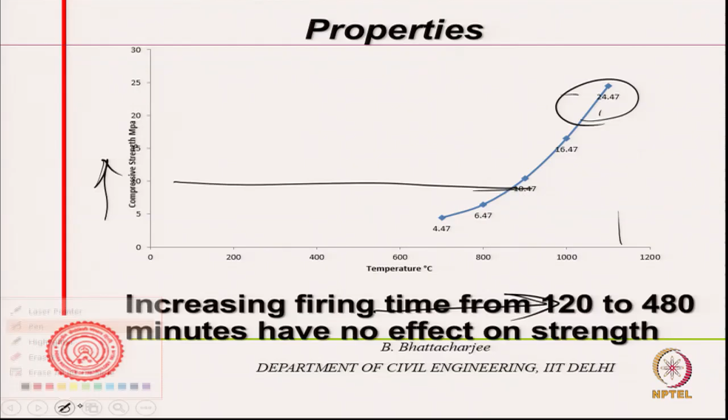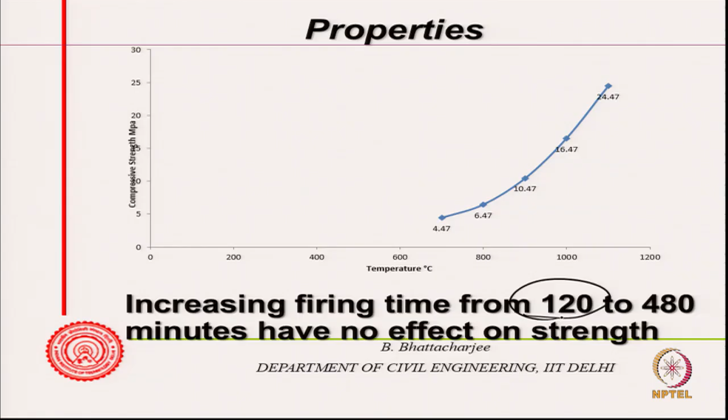Second thing is, increasing firing time of course does not have much of an effect, but at least 2 hours, minimum 2 hours or more, that is the burning time, keeping at the maximum temperature.

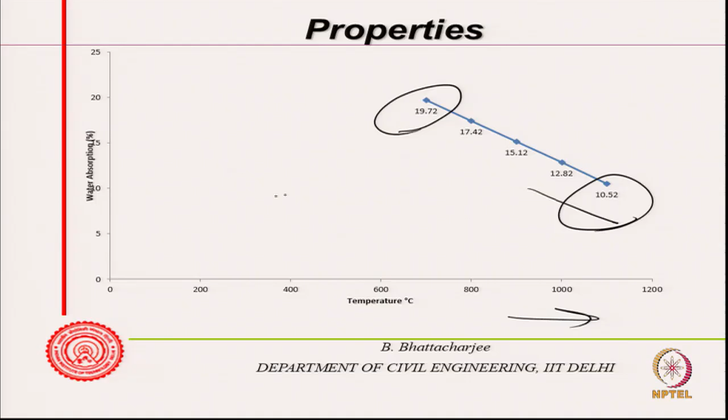Other properties is the water absorption. This is the most important, and this water absorption actually relates to porosity, total porosity. So, as burning temperature increases, water absorption reduces, and you can see the order of this is about 10 to 19%. So, porosity corresponding to this would be even much higher, around 30% or so. So, much higher porosity for these ones.

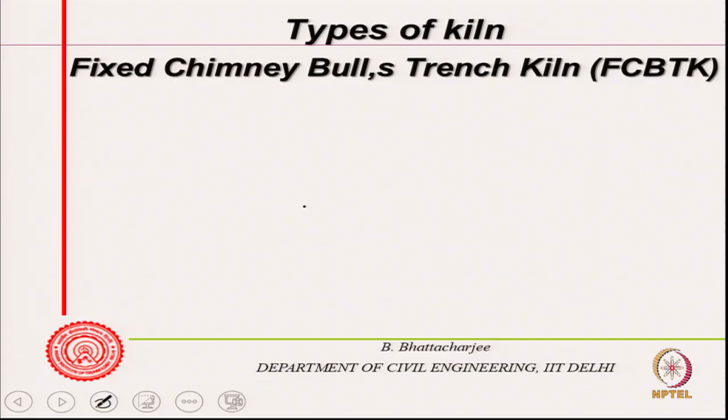Now, where do we produce them? We produce, in the Indian scenario, in the fixed chimney Bull's trench kiln. This is one type of kiln. Here the product is stationary, the fire moves. So, the bricks are arranged in layers, we will see some photographs, and the fire burns and moves from place to place, and then of course, they are taken out.

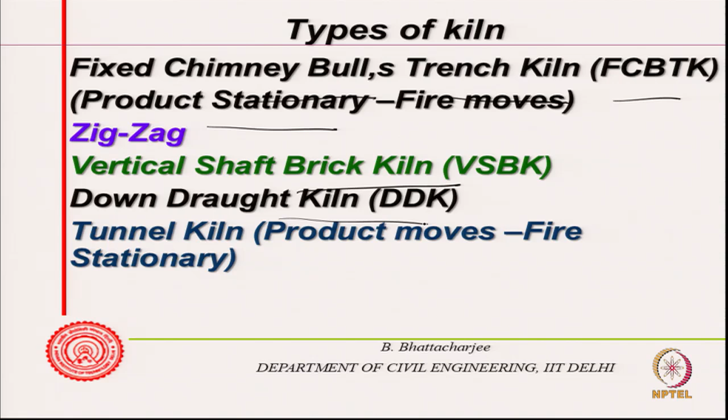So, we have seen before that it is made into plastic state, then molded and dried, and then of course, this will happen. Then there is something called zigzag kiln, which is a variation of this one, but now the fire will move in a zigzag fashion rather than in a straightforward fashion. Then of course, vertical shaft brick kiln, down draught kiln, and tunnel kiln. In tunnel kiln, product moves, fire is stationary.

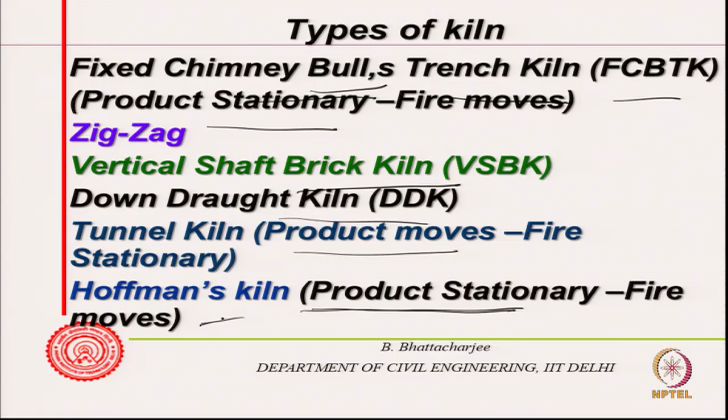So, Hoffman's kiln, product stationary, fire moves. The Bull's trench kiln is named after Mr. Bull, who introduced this in the Indian scenario. So, these are the types of kiln you have. So, we can look into each one of them one by one.

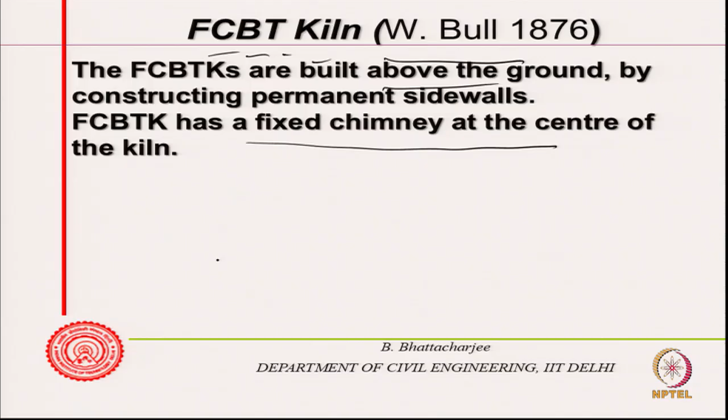So, fixed chimney Bull's trench kiln. This was introduced by W. Bull in 1876. These are built above the ground by constructing permanent side walls and have a fixed chimney at the center of the kiln. Green bricks to be fired are placed in the annular space and covered with a layer of partially fired green bricks as insulation, forming a temporary roof. A layer of ash and brick dust is spread over the top to seal the kiln and to provide thermal insulation.

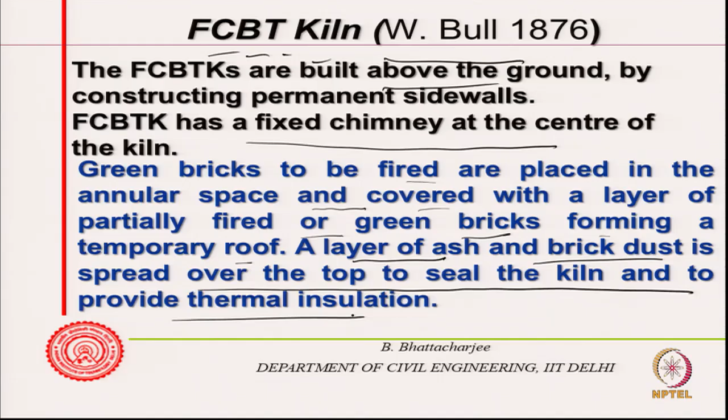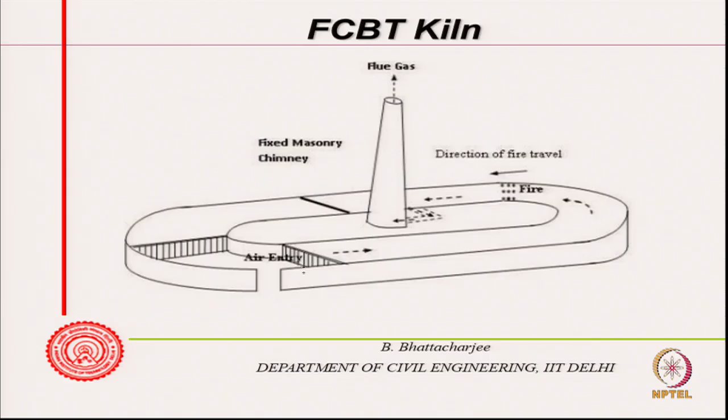So, essentially thermal insulation is provided by the roof, and this is how it looks. The bricks are arranged in this manner. Air will enter from this side, and the fire will move in this direction. The fuel is also in the same arrangement, because you have got layers of bricks and the fuel is also there. So, the fire will move and the smoke will move out through the chimney finally. Once the firing is over and cooled, bricks can be taken away. So, this is the diagram.

So, these are the fired bricks. This is the firing zone, where the firing is still going on, and this is at a higher temperature, and this is the preheating zone. So, first preheating, then these are the green bricks, and there are entry points for the chimney. So, for example, when it was burning here, the smoke would enter like this and reach there. Similarly, when it is burning here, the smoke will enter like this.

So, loading and unloading area is this. So, here green bricks are loaded in this manner, and fired bricks are taken out from this manner, right. So, here you have preheating zone, firing zone, smoking zone, and there is a cooling zone here. So, once cooled, this can be taken out, and loading and firing area.

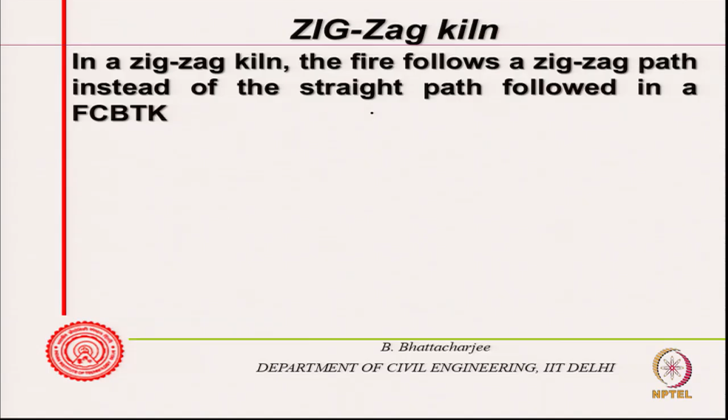There are some open gates through which you can go. So, they are arranged, and the fuel is also there together. So, as you burn, they heat up, and that is how it goes, right. So, this is that fixed chimney Bull's trench kiln that was introduced in 1876, and possibly in many places it is still used. An improvement over this is fire flows in a zigzag path instead of the straight path that is followed here. So, if you see in this one, fire was moving in a straight path.

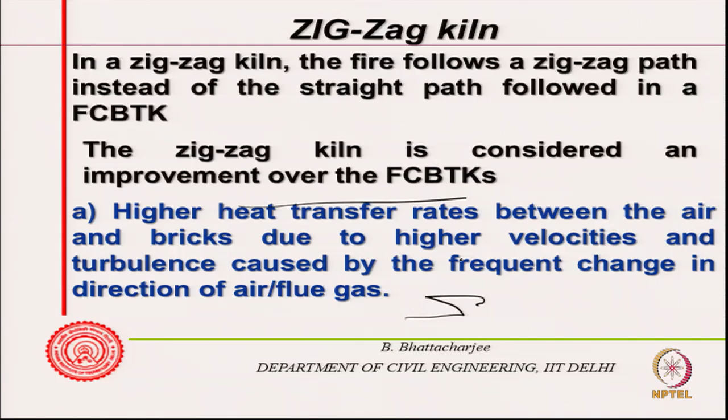The zigzag kiln is considered an improvement over this FCBTK, with higher heat transfer rates between the air and the bricks due to higher velocities and turbulence caused by the zigzag path, frequent change in direction. So, if you change direction, obviously turbulence will be created, and the local velocities could be higher, and that's what gives efficient burning. So, this gives us improved combustion due to better mixing of the air and fuel in the combustion zone, and longer time available for volatiles in the combustion zone, right.

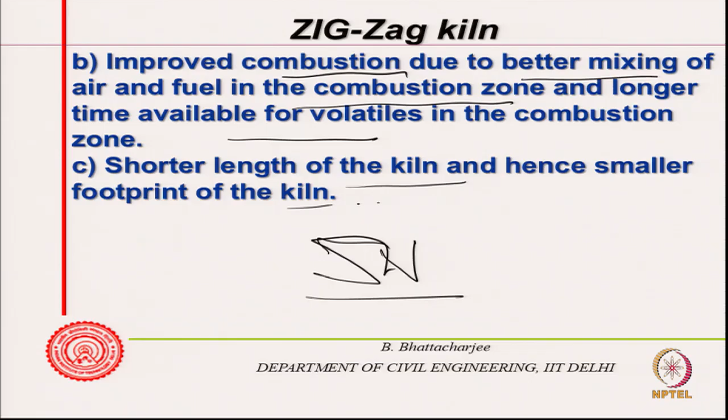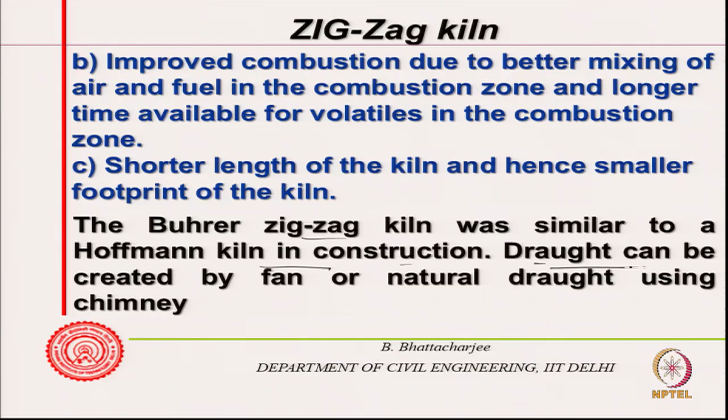Shorter length of the kiln and hence smaller footprint, because now it is zigzag. So, you can cover the same length in a lesser area. So, that's the idea. It is an improvement over the previous one. The Buhrer zigzag kiln was similar to Hoffmann's kiln in construction. Draught can be created by fan or natural draught using chimney. So, basically chimney also creates natural draught. Hot gases will tend to go, cool gases will come in.

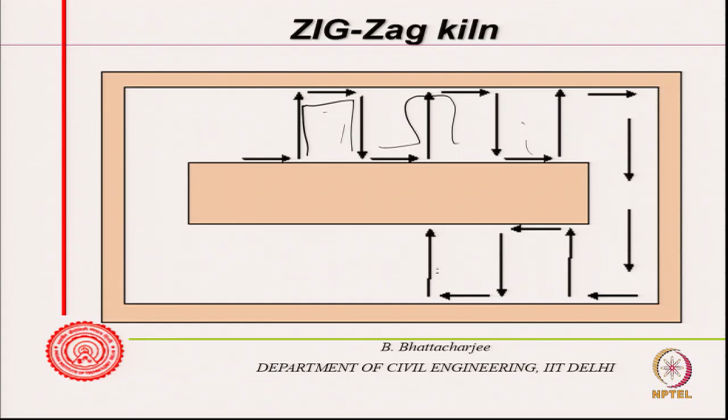In this one, this is how the fire would move, right. So, the path would be something like this. So, bricks would be laid in this manner, so that in the space here it will move in this manner. So, this is how the hot air or the fire moves along in this manner, right. So, this is an improvement over the previous one.

Then there is something called vertical shaft kiln. It has got a vertical shaft of rectangular or square cross section. The shaft is located inside a rectangular brick structure, right. So, the brick structure itself and the shaft is there. The gap between the shaft and the outer kiln wall is filled with insulating material, clay, fly ash or rice husk ash or similar sort of thing.

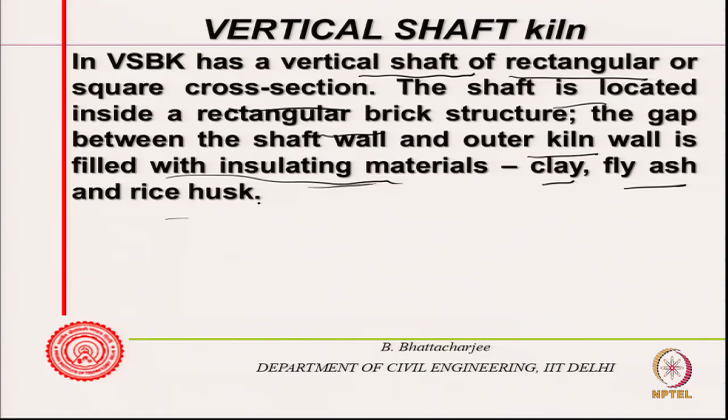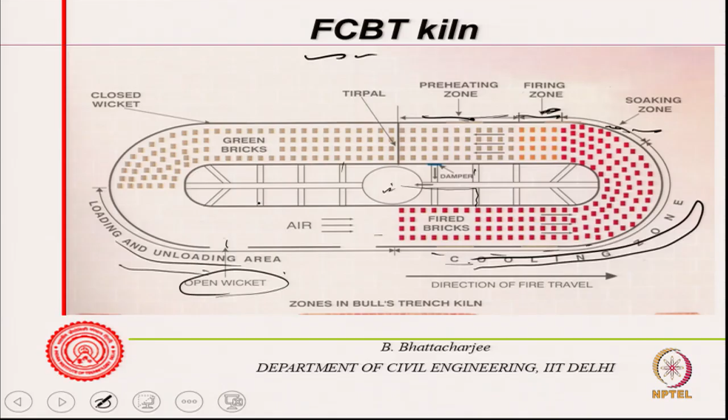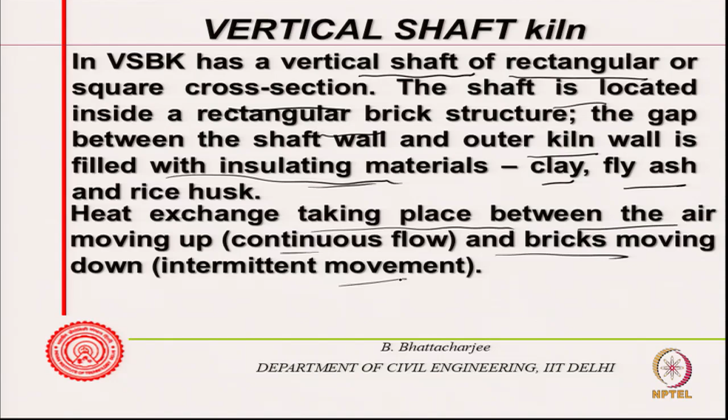So, in both the previous cases you will have this roof covered with partially burned green bricks, and then some ashes or something at the top to make a kind of insulation on top of it. Now, what we are talking about is a vertical shaft kiln. So, heat exchange takes place between the air moving up, continuous flow, and the bricks moving downward, intermittent. So, you feed the bricks, they go downward, hot air goes upward. Obviously, airflow is continuous, but the brick movement is not continuous.

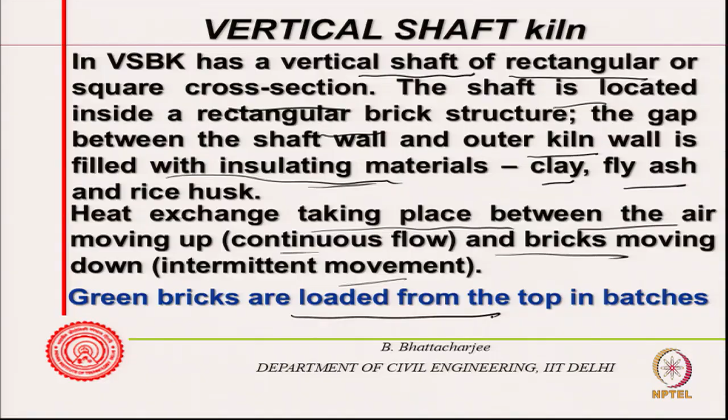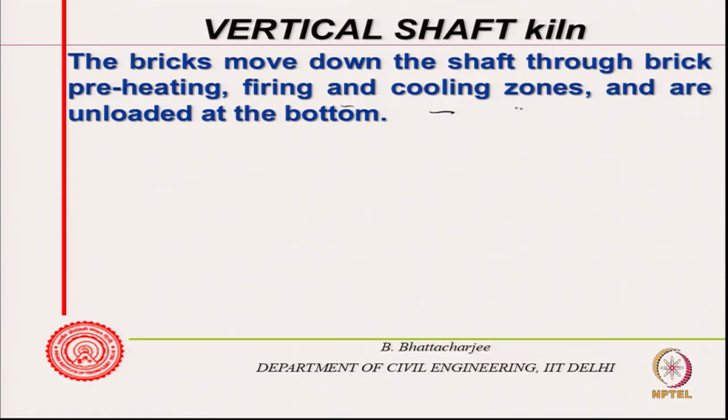So, let us see some diagram. Green bricks are loaded from top in batches. Bricks move down the shaft through brick preheating, firing and cooling zones and are unloaded at the bottom. Now, the combustion of powdered coal put along the bricks at the top, right. So, as the hot gases go up, they will ignite the coal themselves, and simultaneously firing will occur as the intermittent load is going downwards. So, it takes place in the middle of the shaft. Air for combustion enters the shaft at the bottom and gets preheated by hot fired bricks in the lower portion of the shaft before reaching the combustion zone.

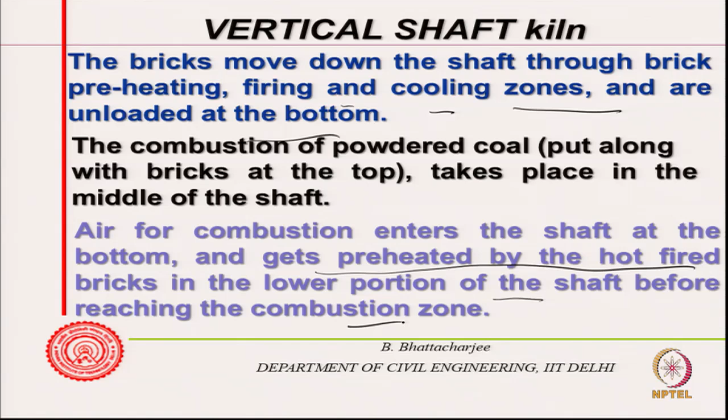So, this is how it looks like. Green bricks are loaded from here, in some sort of supporting system tray or something of that kind, and this itself is a firing zone. Together with this, I load also the fuel. So fuel is also loaded, and the burning is continuing. As the burning is continuing, hot gases, hot air would move through this. This air will ignite the fuel and burning will take place here.

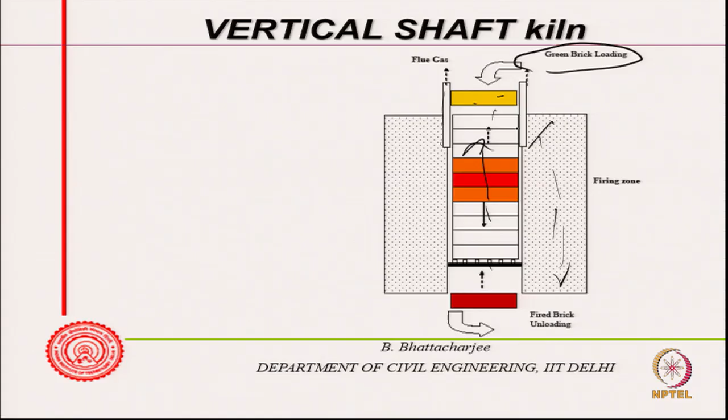So, once this is intermittent, you hold it for a certain period of time during the burning, and then this whole thing comes out. Flue gases will go out from the top and then it is unloaded from the bottom. So, hot flue gases preheat the green bricks in the upper portion of the shaft before exiting from the kiln through the shaft of the chimney. So, this is the shaft of the chimney, through that this will go out.

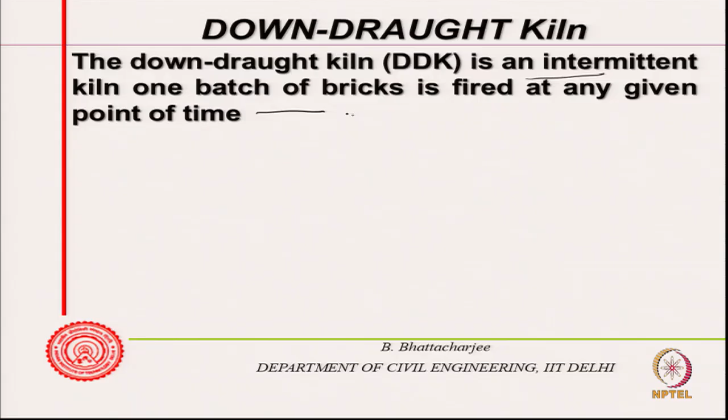So, this was vertical shaft kiln. Then you have down draught kiln, which is an intermittent kiln. One batch of bricks is fired at any given point of time. So, the kiln is first filled with green bricks, then it is fired, and the batch is heated up to the maximum temperature and left to cool. So, in the process of heating, the kiln structure also gets heated up, and while cooling, the stored heat in the structure is lost to the atmosphere.

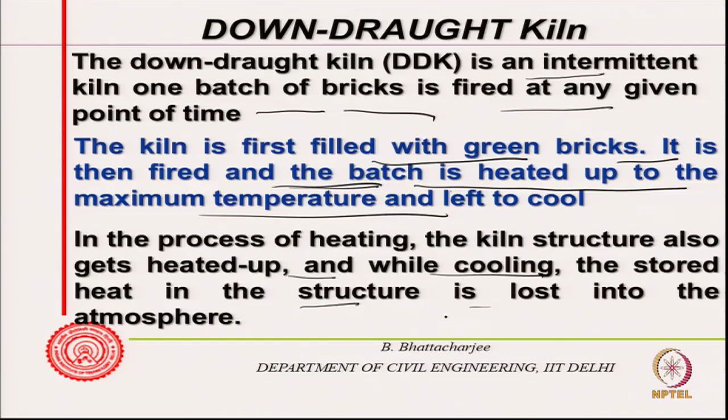So, these are the processes, but then we will look into the energy part of it. We will see that the efficiency of this system is low, because a lot of heat is lost. You first burn them, and then you got to cool it before you load it. So, cooling means the heat whatever was there is actually wasted downwards.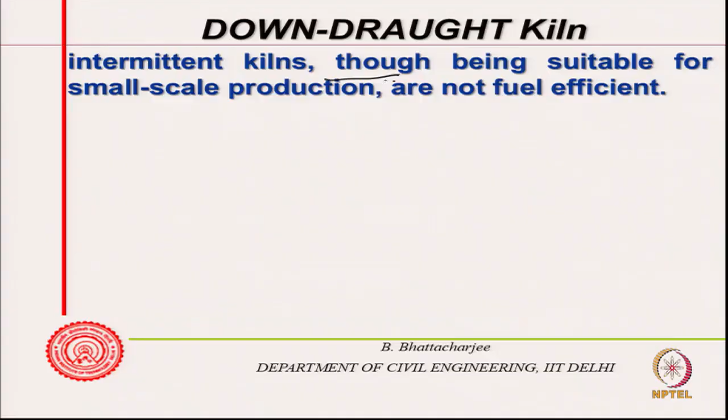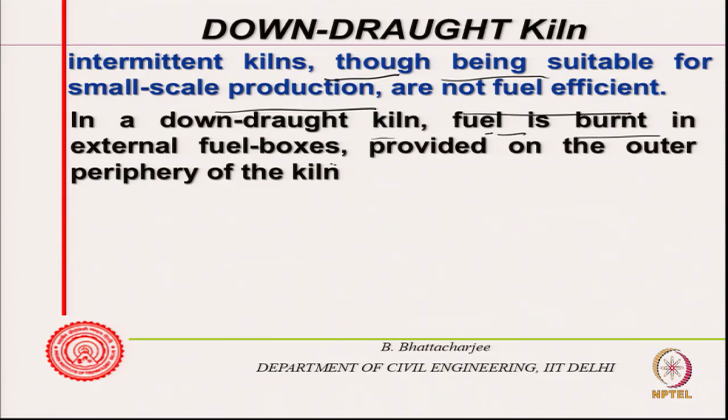So, intermittent kilns, this down draught kiln, though being suitable for small scale production, is not fuel efficient. In down draught kiln, fuel is burnt in external fuel boxes provided in the outer periphery of the kiln. The hot gases from the burning fuel rise to the roof of the kiln. Gases, after being deflected from the roof, flow down through the brick setting, in the process warming and firing the bricks.

So, the bricks rest either upon an open work support of previously fired bricks. That means you might have a kind of support system built in there, which will remain and support the bricks on top of it, or upon some perforated floor, so that hot gases can move upward, and flue gases flow down through the perforated floor into the underground channel, which is connected to a chimney, and are exhausted out of the kiln. So, the warm gases rising through the height of the chimney provide sufficient draught to pull the hot gases down continuously through the stack of green bricks.

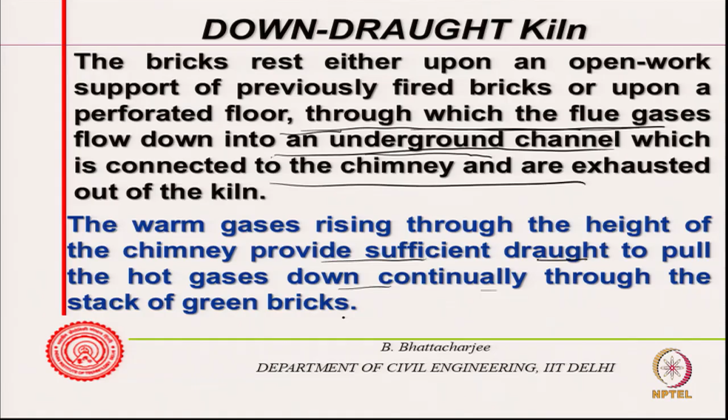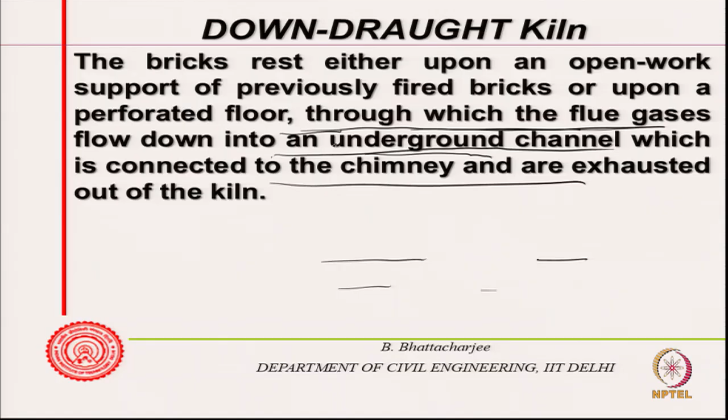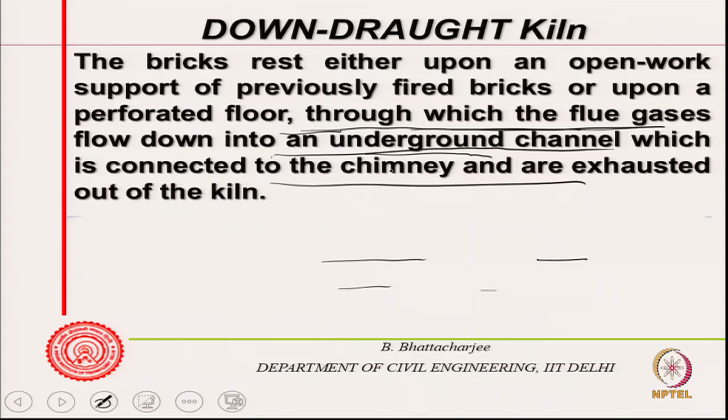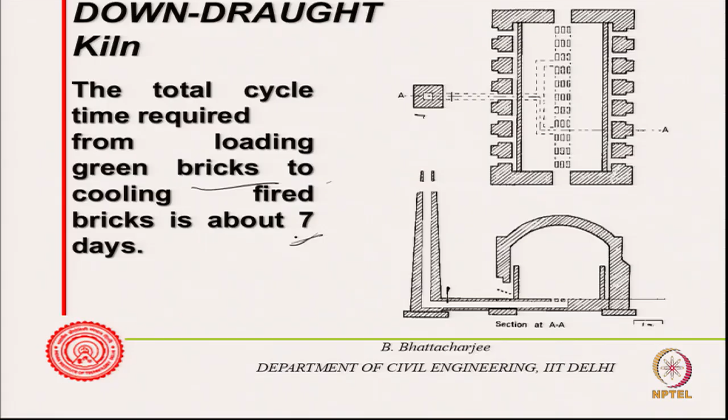So, what you are doing is, fuel is burnt in the external fuel boxes provided on the outer periphery of the kiln. That means it will have boxes in some places where it will burn, the heat will be supplied through this, they will burn and the flue gases will go out like this. So, there is a cycle time because it is intermittent, not continuous. It is around 7 days or so, from loading green bricks to fired bricks to cooling. This is most common, you find them very commonly in many places, because small kilns are of this kind, but not so efficient.

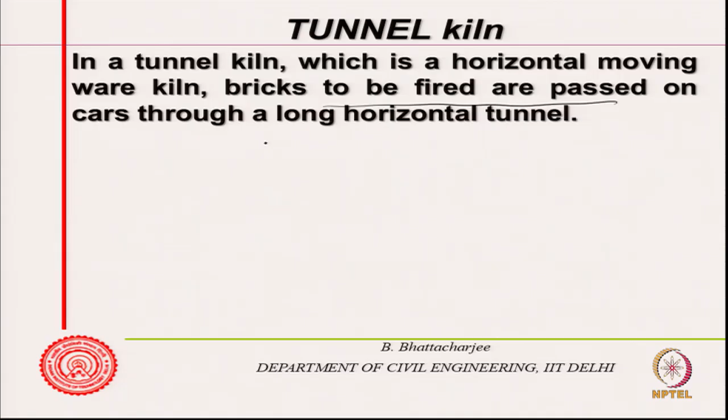In tunnel kiln, which is a horizontal moving ware kiln, bricks to be fired are passed on cars through a long horizontal tunnel. So, the firing zone remains stationary. These cars will move and hold into the firing zone. Once the firing is over, it is taken away and the next lot will come in, where the bricks and air move in counter directions, because cool air will move in one direction, hot air will move in the other direction. So, the green bricks get a little bit preheated.

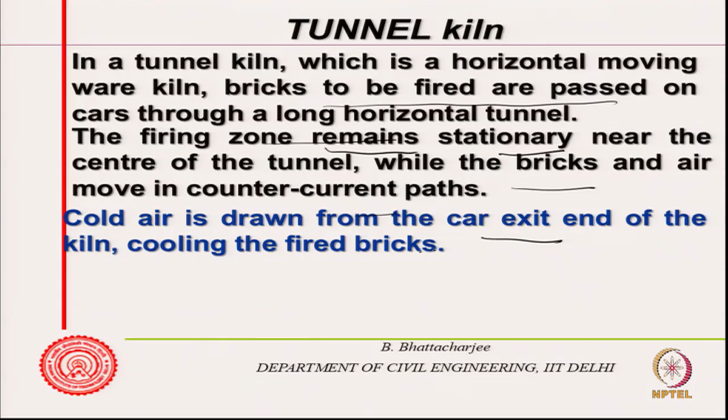So, cold air is drawn from the exit of the car, cooling the fired bricks and preheating the previous bricks. Combustion gases travel towards the car entrance, transferring part of the heat to the incoming green bricks.

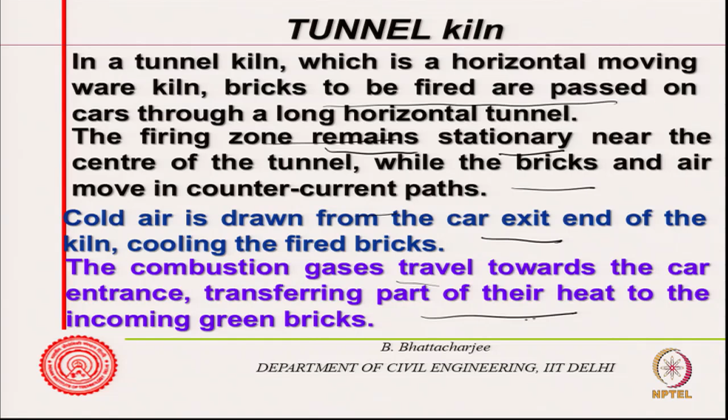The cars can be pushed either continuously or intermittently at fixed time intervals. The tunnel kilns have provisions for air extraction and supply at several points along the length of the kiln.

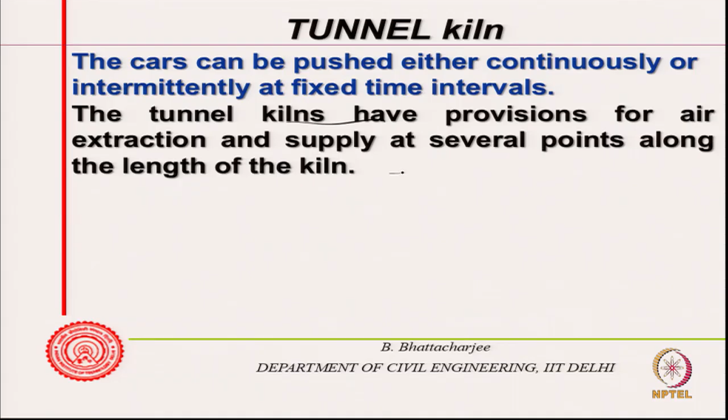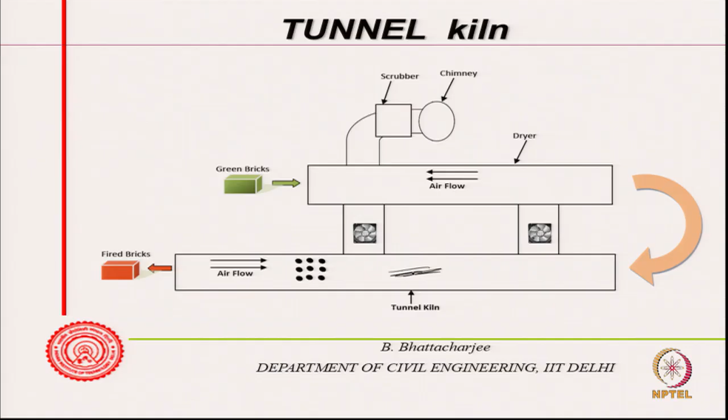So that is the type of bricks. This is what it could look like. You can have a chimney here, a scrubber, green bricks coming in like this, and the hot air flow, and this is the kiln. There is a fan here which drives it out, and air flows through this. The firing occurs in the tunnel kiln here, and the fired bricks come out like this. So this is the kind of bricks and processes involved.

First of all, for clay bricks we use a lot of alluvial soil, which you have to take clay from. So therefore, land is also being occupied to a certain amount. Otherwise, if it is in the form of blocks made from waste material like fly ash, then this is most advantageous. But this traditional method is still very much in practice in some parts, definitely in India.

So we talk in terms of what is called specific energy consumption. It is the thermal energy required to fire 1 kg of brick, per kg per unit. So that is specific energy consumption.

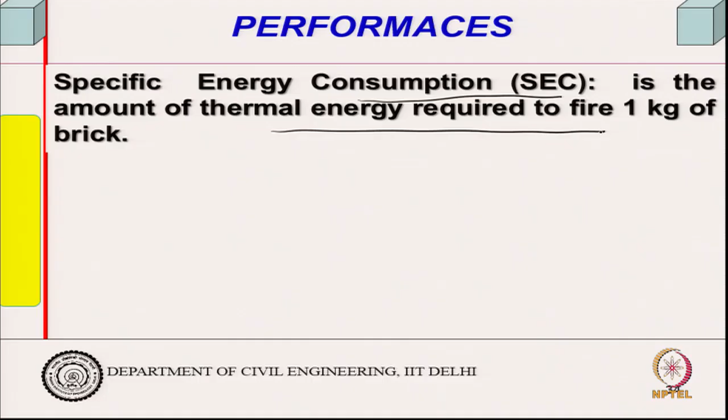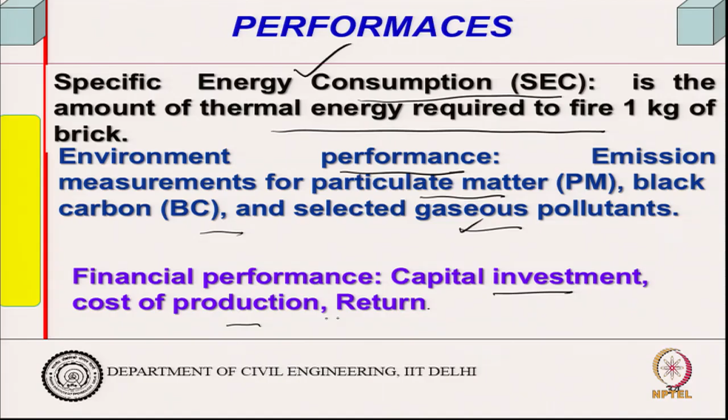Then we talk of environmental performance. So one issue is energy consumption, another issue is environmental performance, which involves emission measurement for particulate matter, black carbon, and selected gaseous pollutants. Then obviously there's financial performance, in terms of capital investment, cost of production, and the return. So these are the 3 performances one looks at.

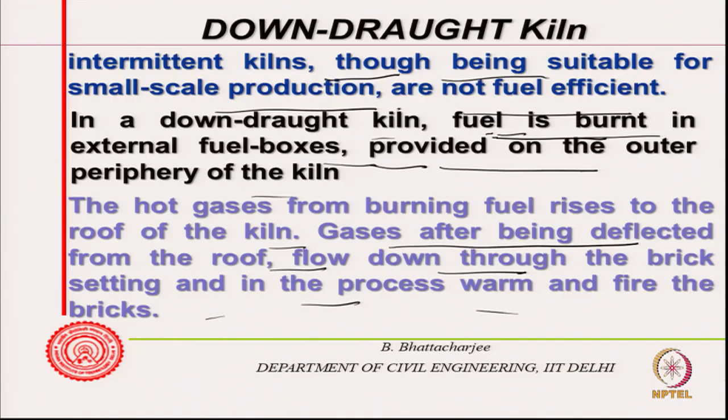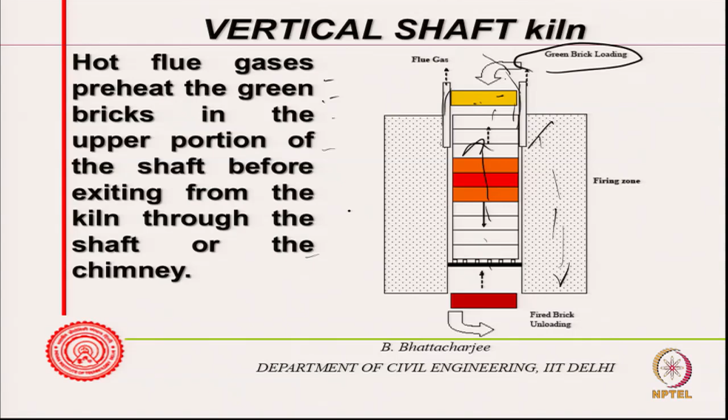You can see the vertical shaft kiln, which we discussed earlier, if you remember. Not this one, the down-draft kiln is one of the worst types. The vertical shaft kiln is what we talked about, and this is the most efficient from an energy performance point of view. So the vertical shaft kiln is the most efficient.

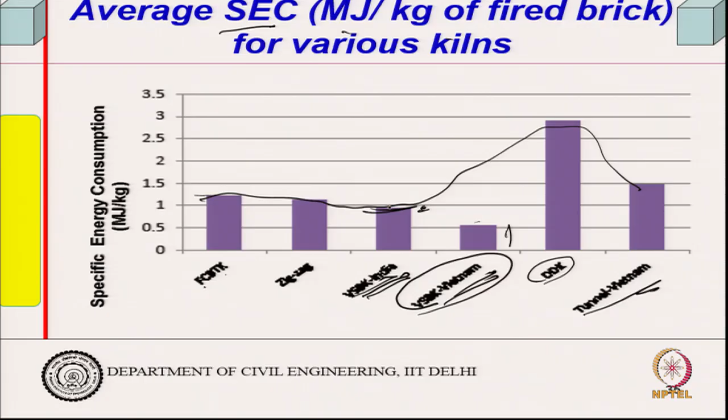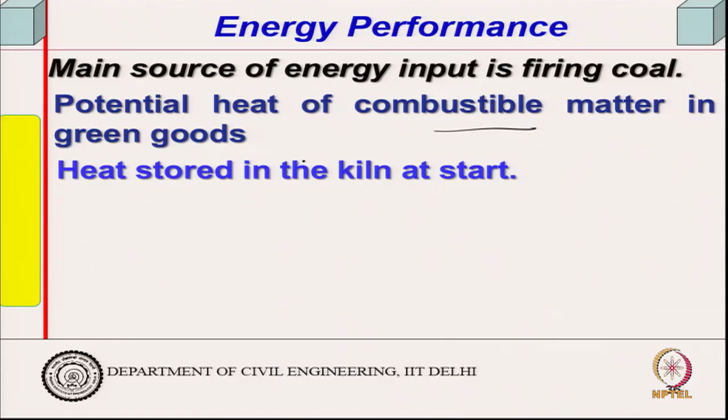Main source of energy input is the firing coal. Earlier people were using timber also. Potential heat of combustion, combustible matter in green goods, obviously that would be there. Heat stored in the kiln at start, and main source of energy output is sensible heat at maximum temperature.

Heat is used in the endothermic reaction that occurs, the vitrification where it forms solid solutions - there the chemical reaction I told you about earlier, that is essentially the silica. First, obviously the water smoking would occur, free water will go away, then the water bound in the silicate and aluminate system goes away, forming the new product.

If you remember, we talked about the chemical decomposition of the clay product, forming into a new fused solid solution, a new kind of compound, and that process - the initial process - was endothermic, it will take a lot of heat. There is an exothermic component also, but mainly the heat is used in the endothermic part of the reaction, like breaking the decomposition of the clay themselves.

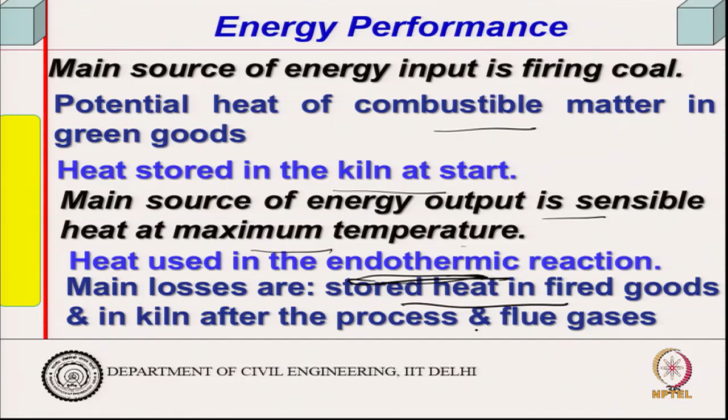So, main losses are stored heat in the fired bricks itself after the process, and also flue gases go out at higher temperature. So, there are some losses from there also.

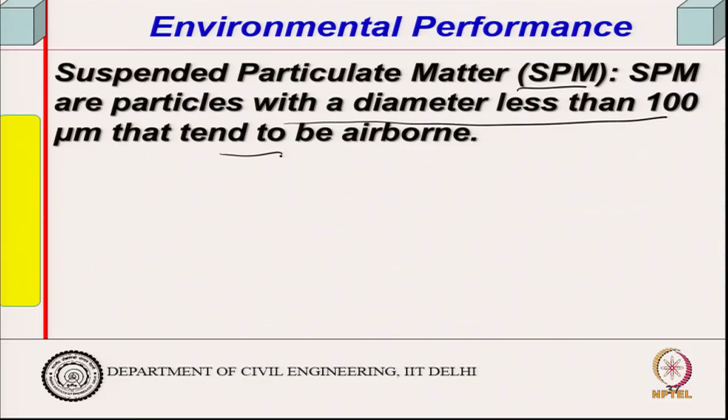Environmental performance is measured in terms of suspended particulate matter - that is particles with diameter less than 100 micron, and that tend to be airborne.

Particulate matter 2.5 is basically the fine particulate matter, diameter less than 2.5 micrometers, which can penetrate deeply into lungs, and it also has a longer atmospheric lifetime and disproportionately greater effect on visibility and climate.

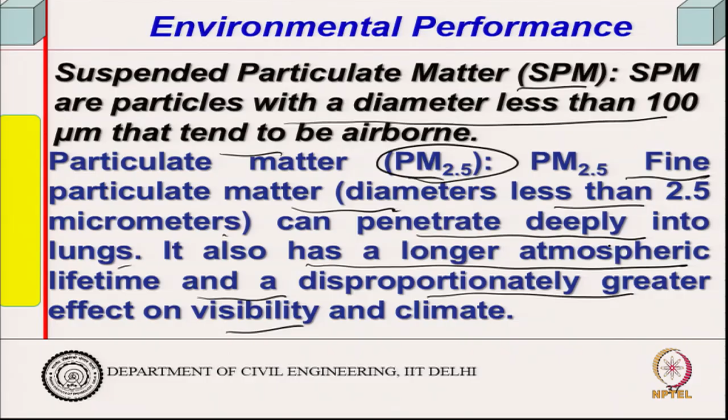That is because these particulate matters come from burning of the fuel that you use in kilns, and since their particle size is very small, they remain suspended for a much longer period of time, and they can actually penetrate through your respiration process into the lungs, and they are dangerous. So, PM2.5 from coal combustion contains some mineral, but also large quantities of carbonaceous aerosol.

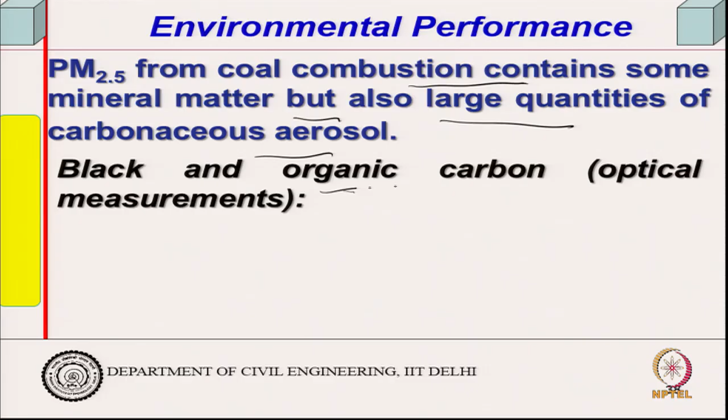So, aerosols are the fine particles that can remain suspended in the air. Also like black and organic carbon, which you can measure through optical measurements.

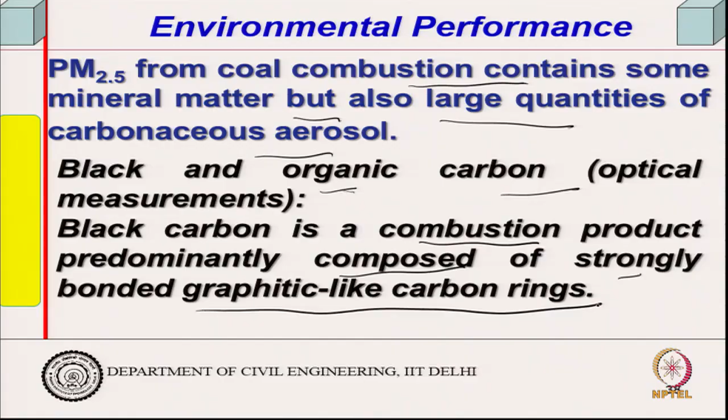Black carbon is a combustion product predominantly composed of strongly bonded graphite-like carbon rings. They are very fine material, aerosol form, and this composition causes black carbon to be thermally stable at high temperature and to strongly absorb visible light.

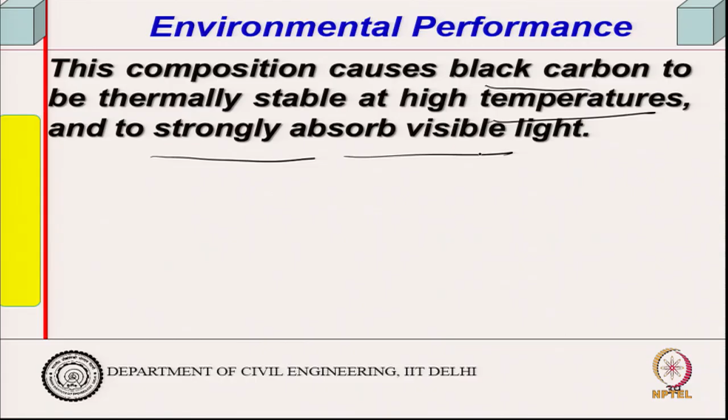So, when you are heating black carbon, it can absorb light and it is stable at higher temperature. So, that remains while your vitrification occurs.

Organic carbon, of course, comprises all carbon species that are neither black nor carbonate carbon - they are all carbons, that is what you call organic carbon. So, they are not necessarily all suspended in air, but black carbon are the ones which can be.

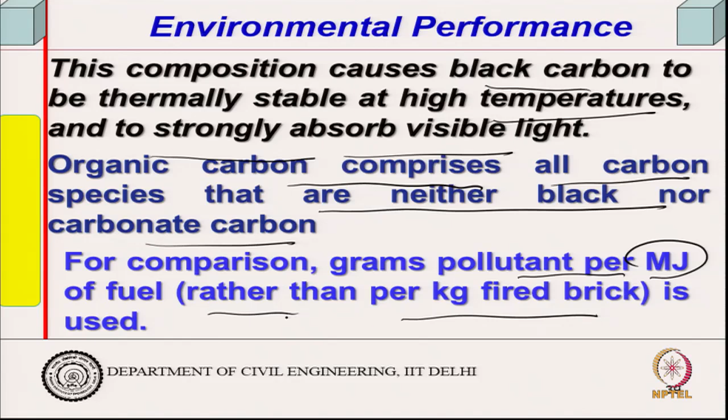For comparison, grams pollutant per megajoule of fuel rather than per kg of fired brick is used. So, we have used specific energy in terms of per kg of brick, but when it comes to pollution, we look into per megajoule of fuel, because the pollutant comes from the fuel, not from the clay itself. So, if you are using more fuel, specific energy consumption is more, so obviously the pollution also would be more.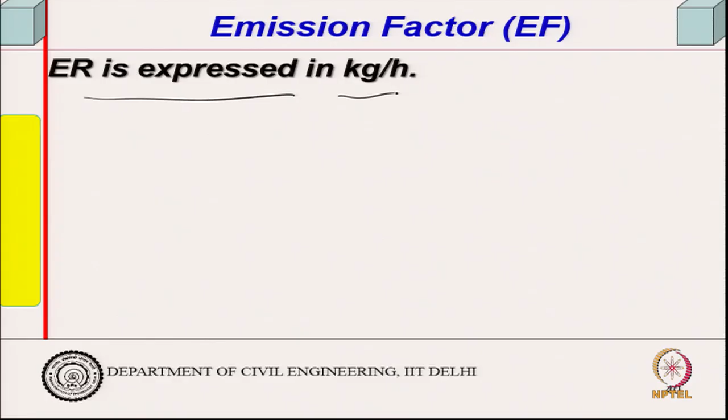Then there is something called emission factor. Emission rate is expressed in kg per hour, where S is the pollutant concentration.

Emission rate is talked about in terms of pollutant concentration, actually in milligrams per cubic meter, and Qs is the flow rate from the chimney. So, if Qs is the flow rate and S is the pollutant concentration, then emission rate equals S into Qs times 10 to the power minus 4, because this is in kg per hour while S is in milligram per cubic meter and Qs is in cubic meter per hour. So, milligram has to be converted into kg.

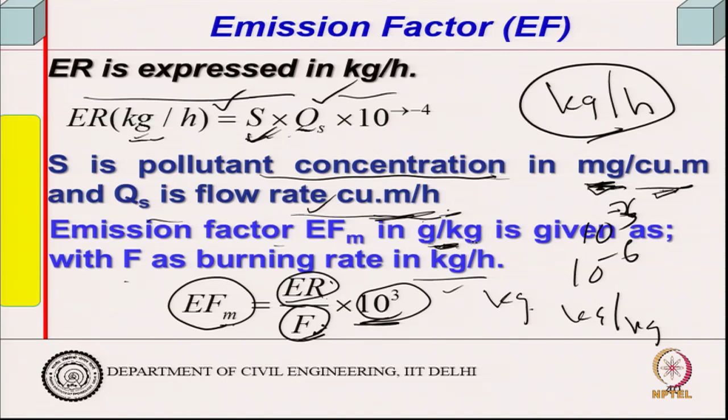So, this emission rate is in kg per hour, this is also in kg per hour, but this is multiplied by 10 to the power 3, because this is expressed in grams per kg. This should have been kg per hour divided by the burning rate, kg per hour. So, emission performance is expressed in grams per kg, burning rate of fuel, and this was pollutant concentration of the flue gases.

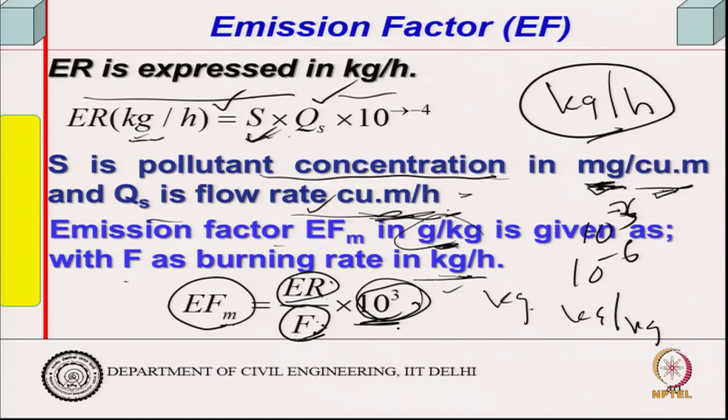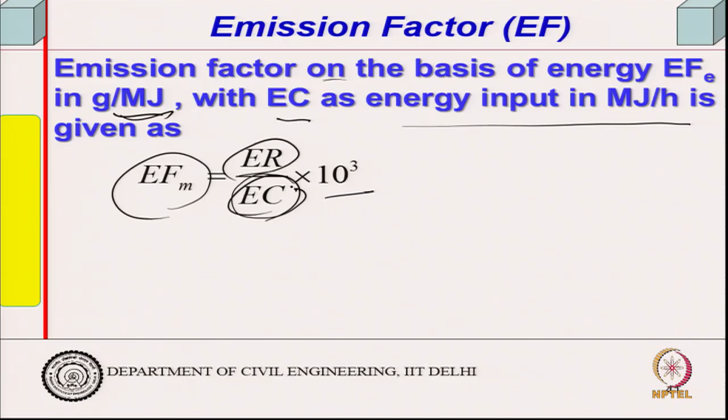So, this is the multiplying factor of 10 to the power 3 coming here, because I think it is converting kg to gram somewhere. We will see that, it will come out. So, emission factor on the basis of energy is grams per megajoule. EC is the energy input in megajoules per hour, given like this: EFM equals ER over EC into 10 to the power 3. So, you can talk in terms of grams per megajoule rather than grams per kg.

So, the product of EFM and SEC gives emission factor performance, product of ER by EC and SEC per kg of brick, because this is expressed in megajoules per kg. And therefore, you can express it in this manner.

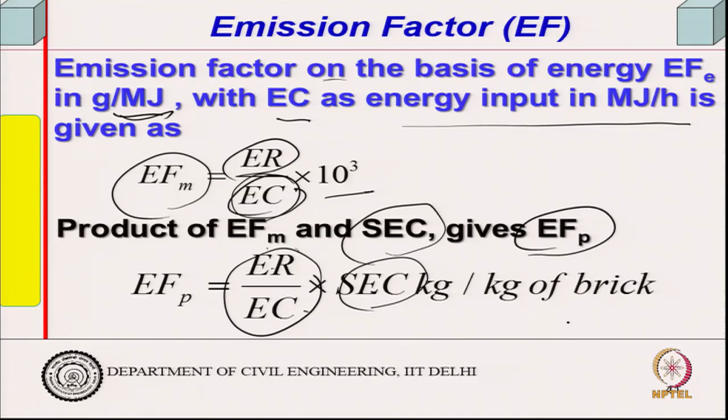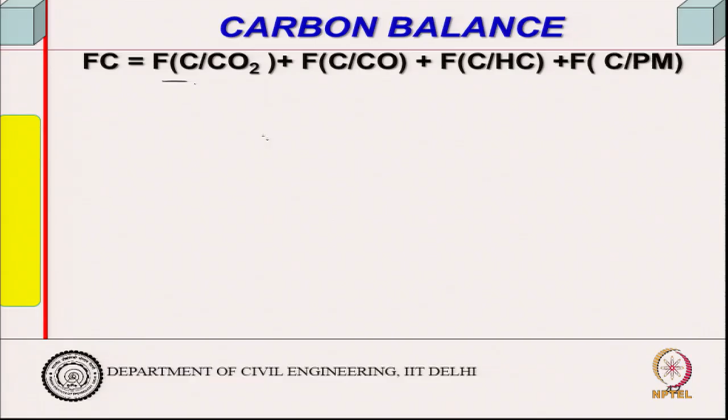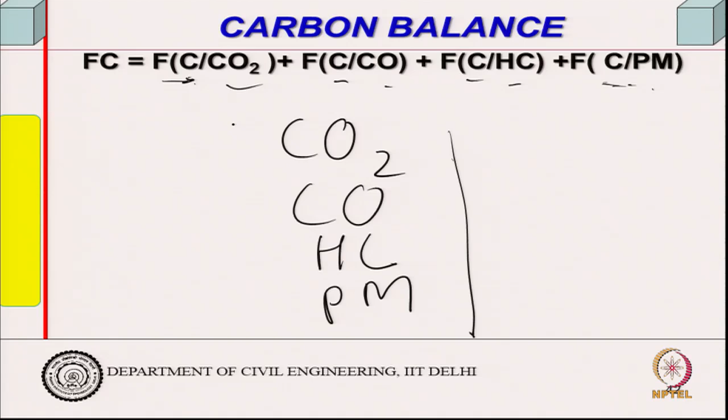Then the other issue is carbon balance. F, of course, is from the fuel, because burning of fuel will produce carbon dioxide, it will also produce carbon monoxide, some hydrocarbons might be left, and some carbon in particulate form like carbon black, etc. So, if the carbon in carbon dioxide, carbon monoxide, hydrocarbons and particulate matter is known, then we can find out how much carbon is in unit fuel, in terms of cubic meter per hour.

So, Fc is the fraction of carbon in the quantity of fuel consumed and is the sum of fractions of carbon in all the components which have carbon. There are 4 components: carbon dioxide, carbon monoxide, hydrocarbons and particulate matter. So, this is the fraction of carbon in carbon dioxide, this is in carbon monoxide, this is in hydrocarbon.

So, carbon dioxide would be Fc minus all this, because we are interested in the carbon dioxide. Fc divided by quantity of carbon dioxide is written in terms of a term K. So, carbon dioxide is Fc over 1 plus K, where K stands for the proportion of carbon monoxide, hydrocarbon, and carbon in particulate matter with respect to carbon dioxide. So, if you know Fc, one can obtain how much carbon dioxide is produced.